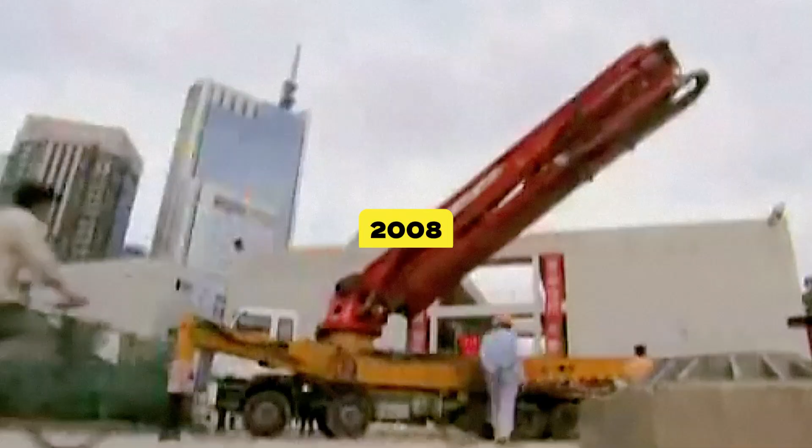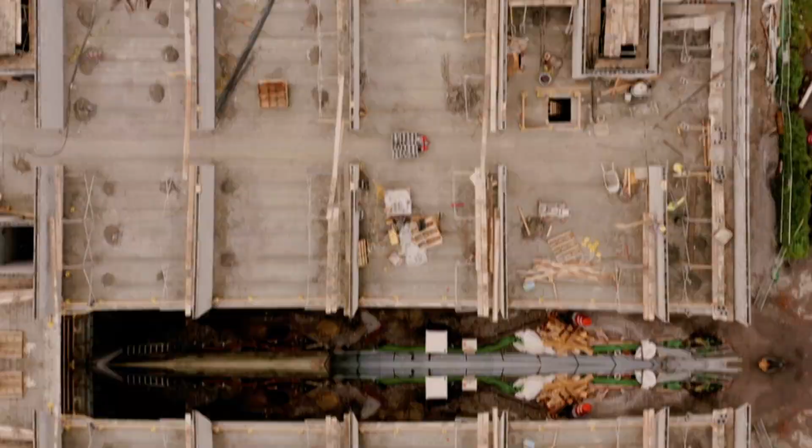But as the team began planning the Shanghai Tower, they hit their first major roadblock. Quite literally, beneath the surface, the ground under Shanghai is soft, too soft for a structure that would eventually weigh over 850,000 tons. The risk? The tower could sink, tilt, or even worse.

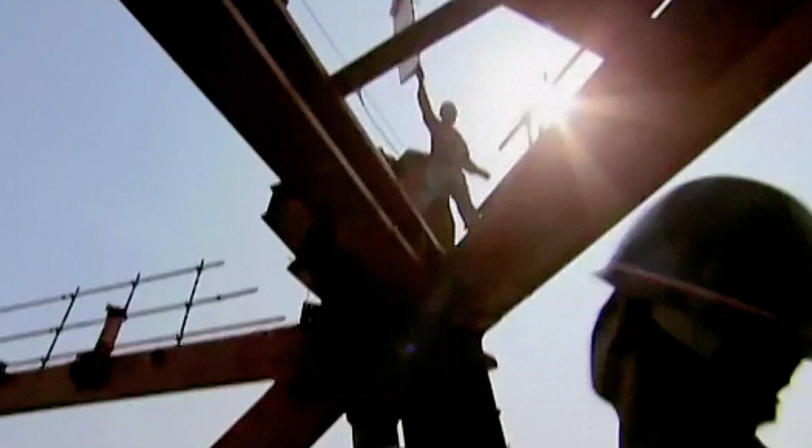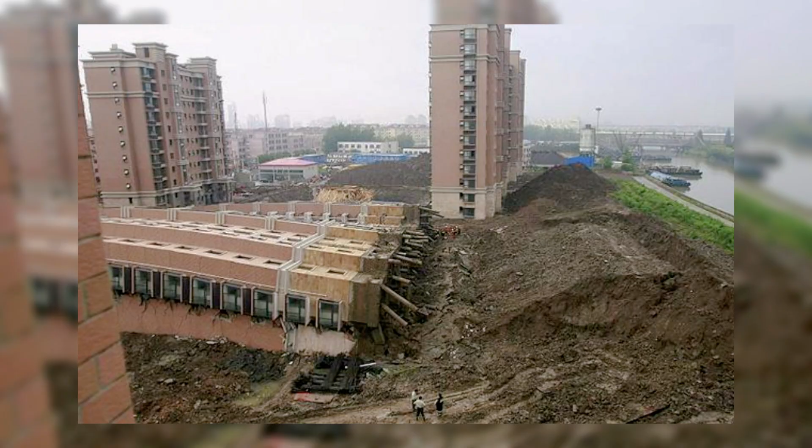And then, just a few months into construction, something happened that shook everyone to their core. A nearby apartment complex collapsed. Why? The foundation couldn't hold up when crews dug out dirt on one side and it piled up on the other, creating a pressure imbalance that was too much for the soil to handle. Luckily, no one was living there at the time, so it didn't make global headlines, but it sent a clear message. If this could happen to an apartment, what would happen if the foundation of the Shanghai Tower failed?

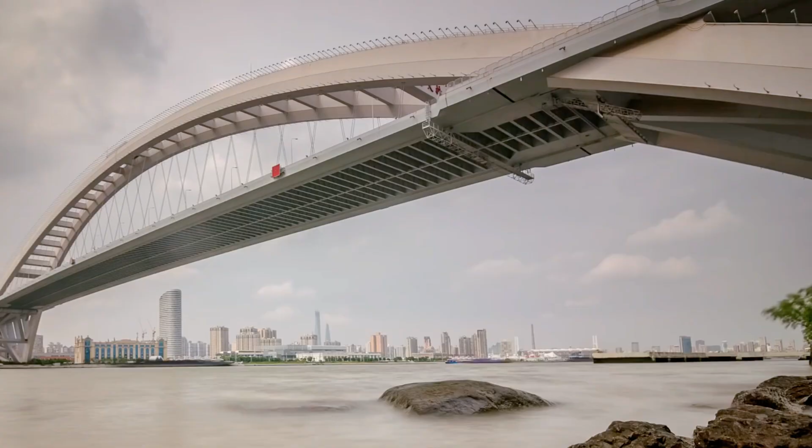This was the moment of truth. The team knew that a failure here wouldn't just make the news, it would be a catastrophe on a global scale. Ji Gong, a geotechnical expert on the project, had a chilling realization: if they didn't get the foundation right, the consequences would be catastrophic. We're talking power failures, sinkholes, and even the sinking of nearby buildings. This wasn't just about building a tall structure, it was about making sure it could stand the test of time without devastating the entire city.

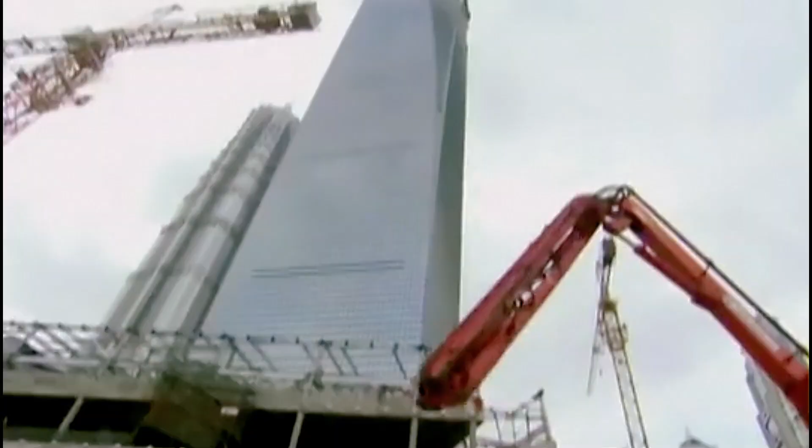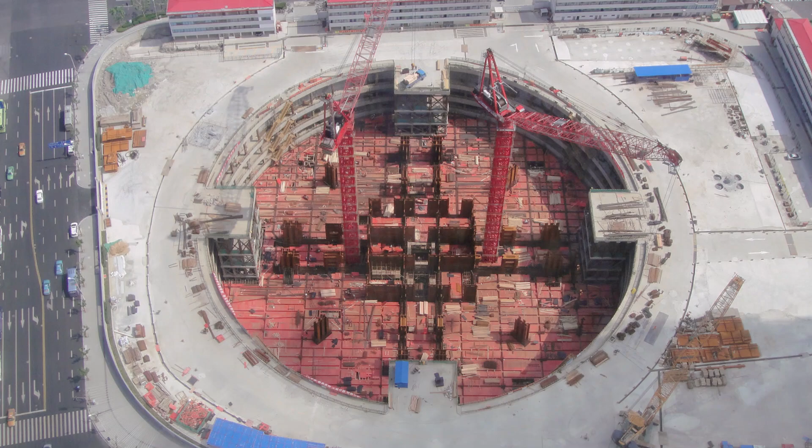So how did they pull it off? Well, the solution was anything but simple. It started with a genius 3-part plan to make sure the tower was as stable as a rock, literally. First, they spread the weight of the tower across a much wider base, made of reinforced concrete. Think of it like spreading your weight across a thick, sturdy mat instead of standing on a single plank.

This way, the soil underneath wouldn't buckle under the massive pressure. But that was just the beginning.

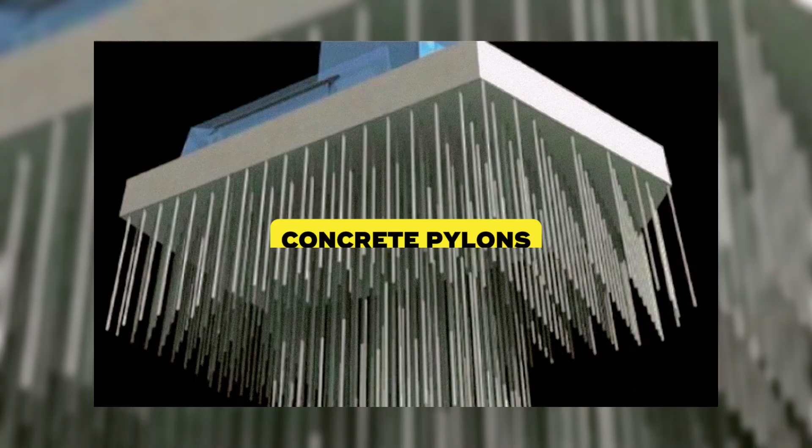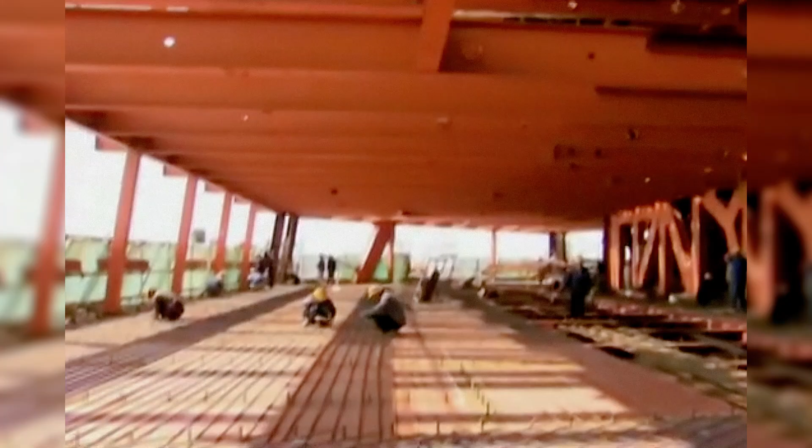Beneath this reinforced base, they drove concrete pylons deep into the ground, about 1,000 of them. These pylons acted like giant stakes, anchoring the tower firmly into the earth. And if that wasn't enough, the engineers decided to go even further. They planned for 5 entire floors of the tower to be underground. This wasn't just for extra space, it was a strategic move to lower the building's center of gravity and ensure it stayed put, no matter what.

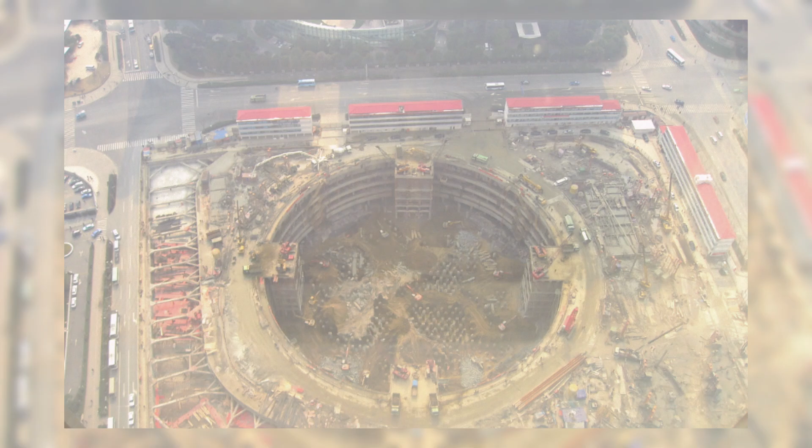To make all this happen, the first step was to dig a gigantic pit, 121 meters across and 33 meters deep. They poured the concrete for the foundation in one go, all within 3 days. Just think about the precision and speed required to pull that off.

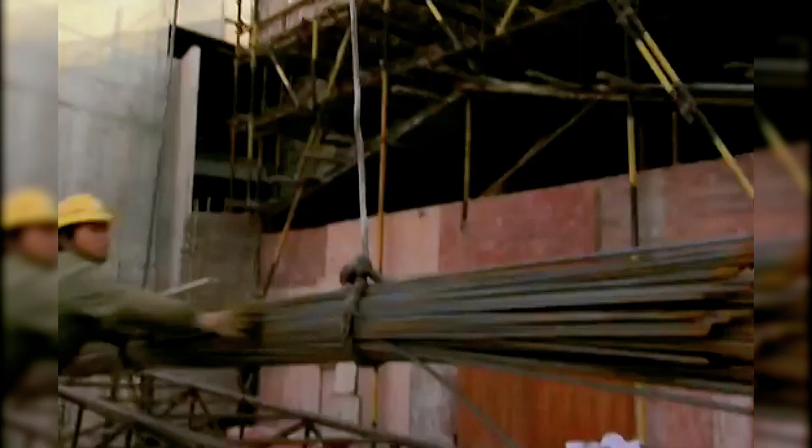First, they had to create the core of the building using reinforced concrete. Sounds simple, right? But here's where it gets interesting. The technique they used is called slip forming, a massive steel platform weighing about 1,000 tons, packed with all the machines and tools needed to build each floor. This giant platform would slowly rise, bit by bit, as each floor was completed, and it took a full 6 hours just to move this platform up to the next level. That's a long wait, but when safety and precision are at stake, every minute counts.

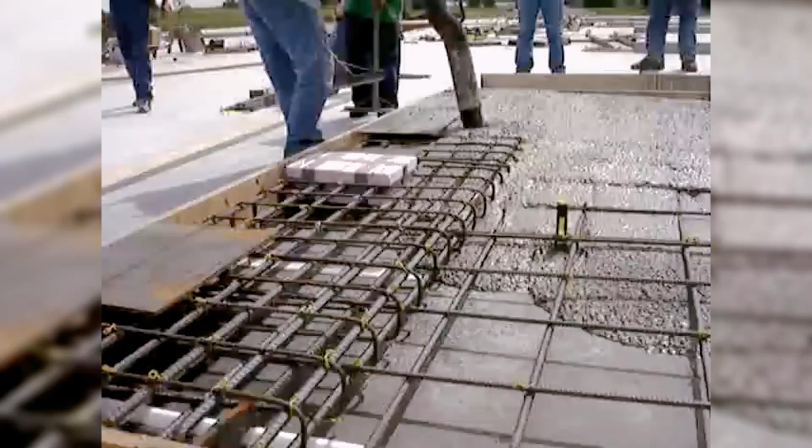Now, let's talk about the concrete. This wasn't just any ordinary concrete, they used a special type called self-compacting concrete. Why? Because it's super fluid and easy to work with. This concrete was pumped up through a maze of pipes to the platform, where workers carefully poured it into place. Day by day, floor by floor, they inched their way upward, about one floor every 5 days.

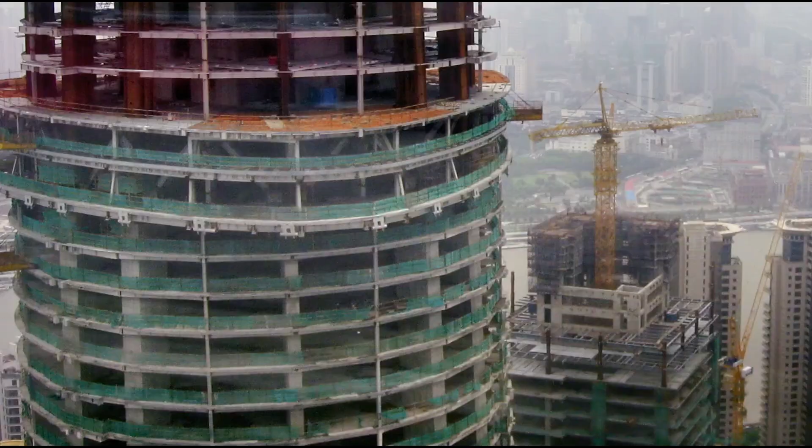Slowly but surely, the skeleton of the tower began to take shape, rising higher and higher until it pierced the skyline of Shanghai. As the months went by, this structure started to outgrow the neighboring towers, climbing higher until June 2014. That's when they placed the crown on top, marking the tower's final height, but they weren't done yet.

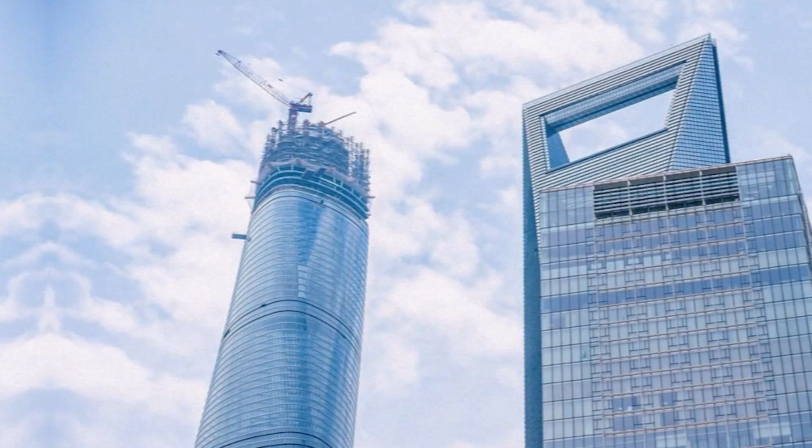After reaching the top, they began working on the glass facade that would give the tower its sleek, modern look. And finally, the interior design was completed. By February 2015, this towering giant was ready to welcome the public.

The Shanghai Tower, a true giant at 632 meters, or about 2,073 feet. This isn't just any skyscraper, it's the tallest building in China and the second tallest in the world. But there's more to it than just its height.

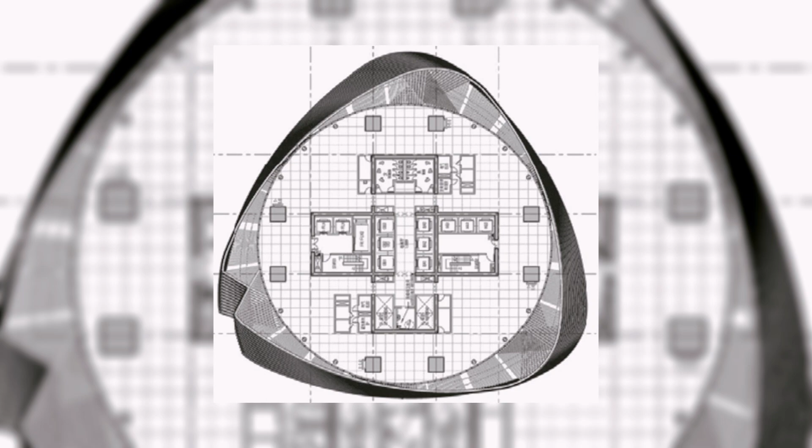Have you ever noticed how it spirals elegantly as it climbs skyward? That's not just for show. The glass twists a full 120 degrees as it rises, creating an amazing visual effect. But how did they achieve that? The secret lies in its core. The designers divided it into 9 sections, each one rotated just a bit from the one below, giving the tower its signature twist. They initially had an even more dramatic whirlpool-like design in mind, but had to tone it down for safety reasons. Now, here's something you probably didn't know.

This place is spread across 128 floors, all seamlessly connected by 149 elevators. But not just any elevators, 3 of them are the fastest in the world, zipping you around at an incredible 65 kilometers per hour.

One of the most incredible features of the tower is a glass facade that wraps around the entire tower. But here's the twist, it's not just a single layer of glass like most buildings. No, the Shanghai Tower takes it up a notch with double paned glass. Now, you might be thinking, okay, but why does that matter? Most skyscrapers use a single layer of glass that's super reflective and opaque, all in the name of reducing heat.

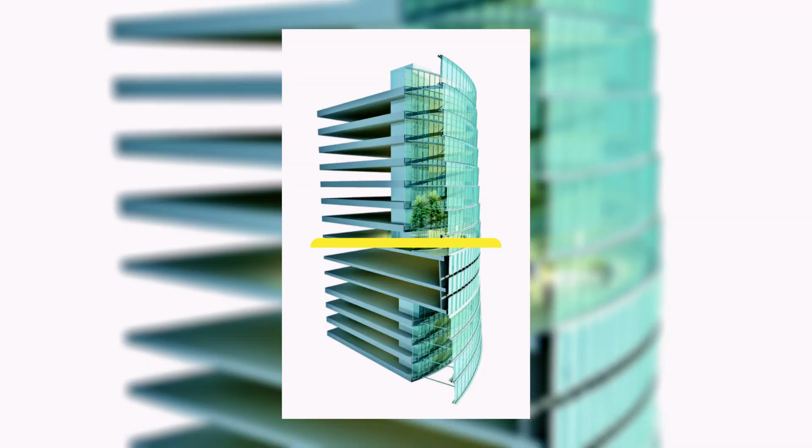But the Shanghai Tower, it's got something better. With 2 layers of glass and a good amount of space between them, this tower creates a natural heat buffer. This means less reliance on power-hungry air conditioning and more natural light flooding into the offices. And inside those buffer zones, the architects have created hanging gardens in the middle of this towering giant. You'll find these green, serene spaces that just breathe life into the building. It's not just about looking good, it's about sustainability.

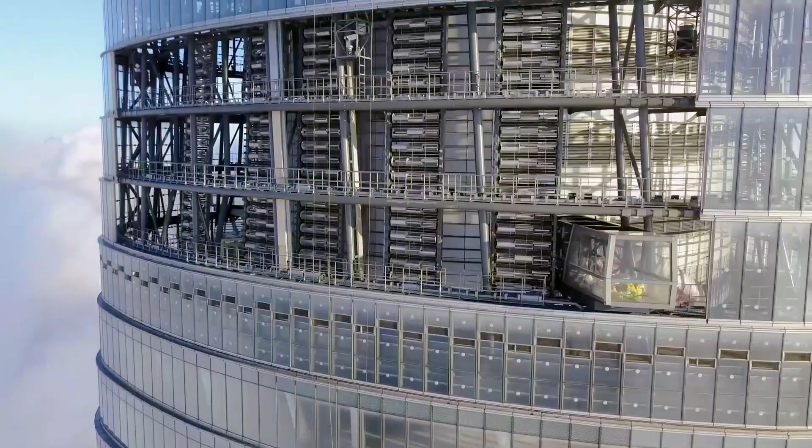The Shanghai Tower didn't just stop at double-paned glass and gardens. They built wind turbines and even a system to capture and reuse rainwater. All of this innovation earned the tower something special: platinum certification from LEED, making it the tallest building ever to snag that award. But what does that mean for you? It means this building is a leader in sustainability, setting the standard for the future of skyscrapers.

Alright, you've probably seen the building and know a bit about its design and construction, but here's the real question that's probably bugging you. Why did it become such a controversial project? Why is it that nobody wants to live there? Let's get into it. Building the Shanghai Tower wasn't cheap.

We're talking a whopping $2.4 billion just to get it off the ground. But no biggie, right? The idea was that all this money would be paid back through a flood of businesses moving into these sleek new office spaces. Except that didn't exactly happen.

Fast forward to 2017 and things started to unravel. The tower management drops a bombshell. They're struggling to rent out spaces. Why? Because they hadn't secured all the necessary permits from the fire department. Yeah, something as basic as that.

So, guess what happened next? The businesses they were counting on stayed away, and even the few that did sign leases, most of them hadn't even moved in yet. It's like paying rent for an office you can't even use. But here's the question: is the Shanghai Tower the success it was supposed to be? Or is it just a $2.4 billion lesson in what happens when grand plans meet harsh realities?

Another drawback was its spiral glass facade that looks straight out of a sci-fi movie. It's designed to impress, right? The twisted design created floor space with weird, unusable corners and edges. Companies were hesitant to fork out cash for these odd-shaped areas, and it quickly became a problem.